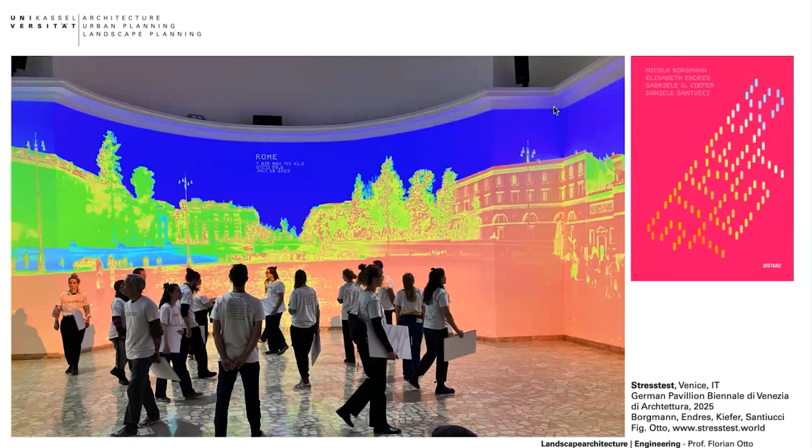Landscape architecture has arrived in the center of discussion of urbanism and architecture. You can see this very well in the German pavilion in the Biennale in Venice. This stress test claims that the cities are losing their capacity to host people in a good way, linked to the climate change or because of the climate change and the heat waves that we are facing there.

And that brings us, Bauchplan, and also the teaching in the university to the point that maybe the three elements of sustainability, environmental, economic, and social have to be put in another relation, so that every intervention has to follow that climate change impacts.

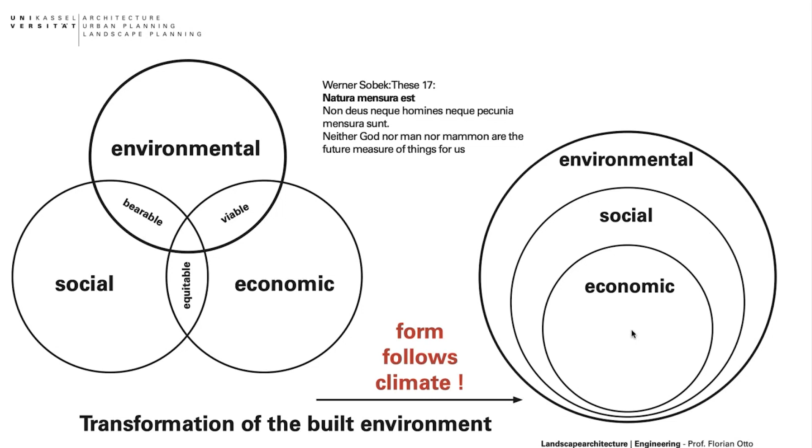And that goes along with the climate protection, of course, but especially for landscape architecture and urban space planning, climate adaptation and the climate perception, so that the physical aspect of what we do for the people in the cities, and climate justice, which is an especially important aspect to my mind.

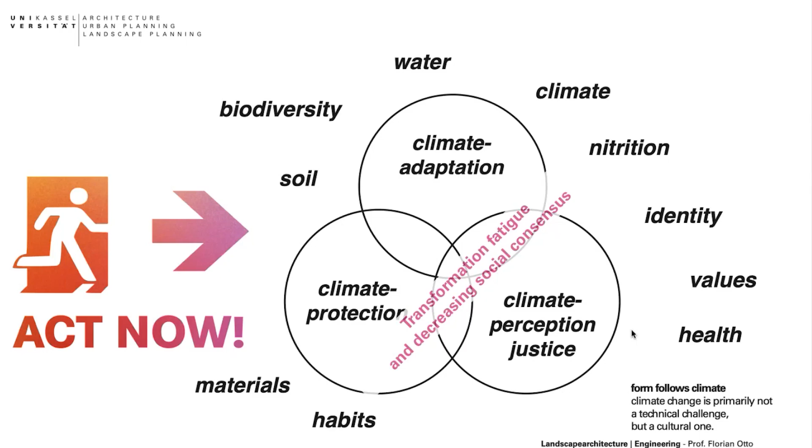And this comes into a time where we have something like a transformation fatigue. People are tired of changing systems. We have a rollback in policies, and we are losing a social consensus that we have to change and act according to climate change.

In front of this background, I was able to work in a research project for the Federal Office of City Development of Germany, the BBSR. There was a collaboration between the university and Bauchplan, and meanwhile this research is being carried on in a second step. I will try to give you an insight now into this research work, and then I will try to show you the showcase of Karlsruhe train station square.

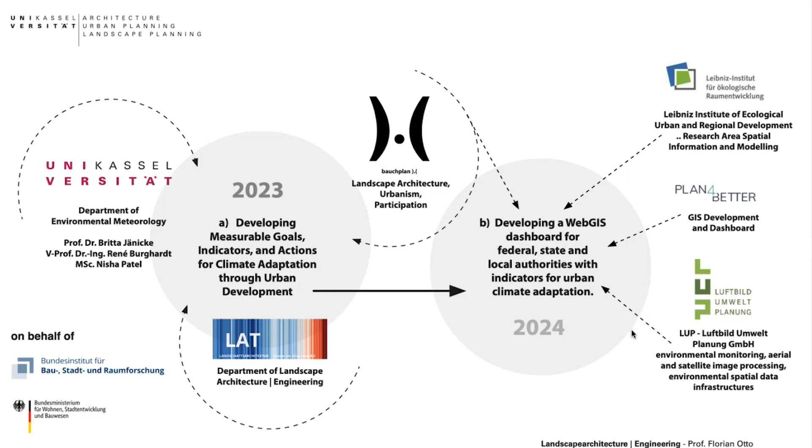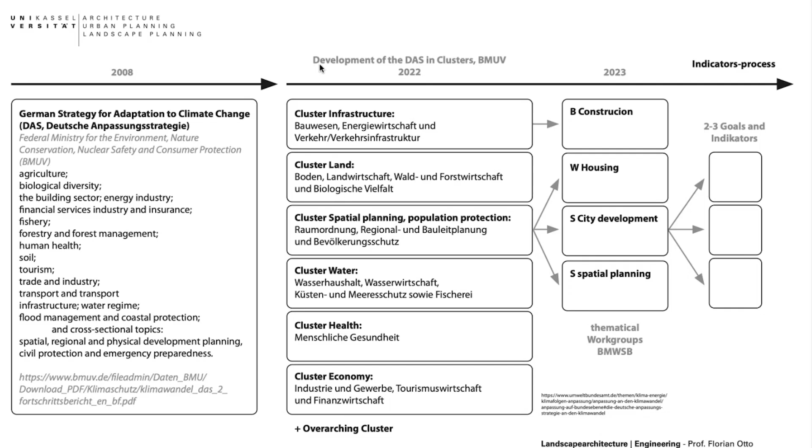So the whole project is embodied into the adjustment strategies of the German government that was launched some years ago, already in 2008. Adaptation strategies for the climate change, and we're in this cluster of spatial planning and population protection.

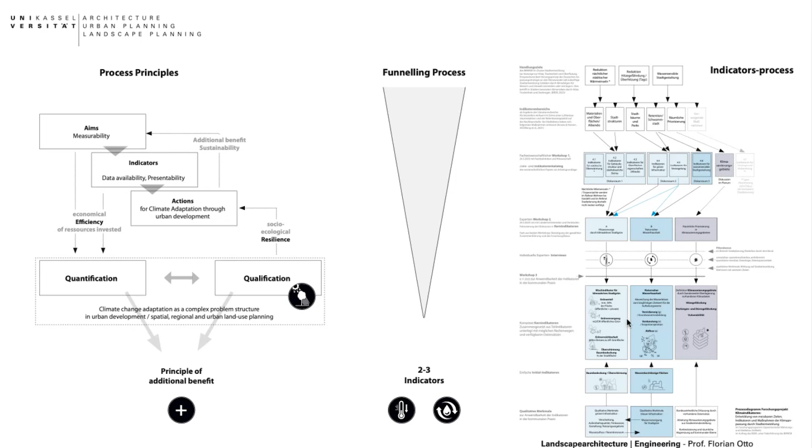And we were asked to find indicators for the successful adaptation in the field of town planning to climate change. In a funneling process with expert interviews and expert workshops, we finally identified two key indicators that can address an adaptation process or an adaptation strategy.

That this is a blue infrastructure and a green infrastructure, the natural water balance as the equilibriums of evapotranspiration, direct runoff, and groundwater formation on the one side, and this of course linked to the green infrastructure, where we made a key indicator

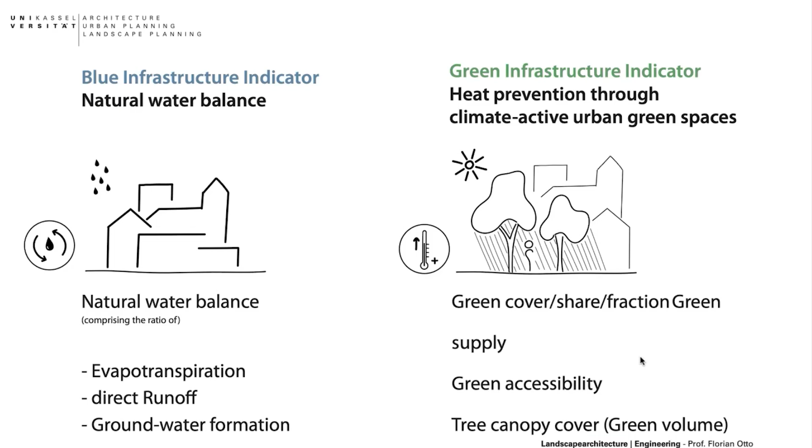comprised of four part indicators, which is the green cover, or the green surfaces in the cities, the green supply, which is rather linked to the population, not to the space, the accessibility to green shaded spaces, and the tree canopy factor, which is also linked to the nature restoration law of the European Union.

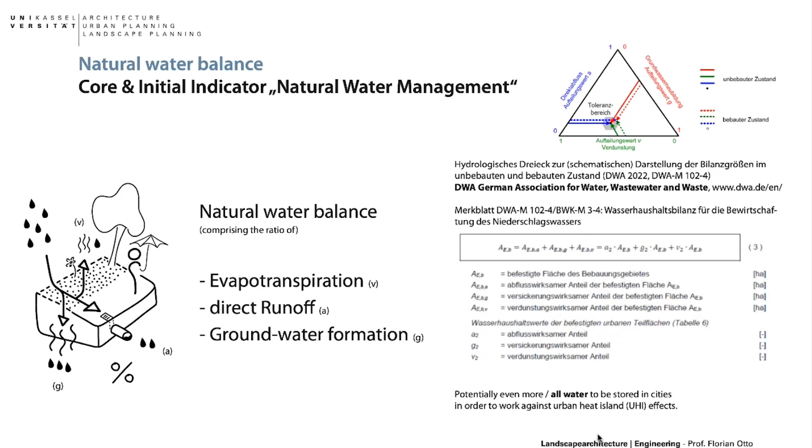So the natural water balance is a figure which is well known and which can be calculated very sharp. The problem is that in existing areas, you normally lack the exact data to calculate it. So because the indicators are to be developed for the existing cities in Germany bigger than 10,000 people at the overall federal level, we rather work with the sealing percentage of the soil.

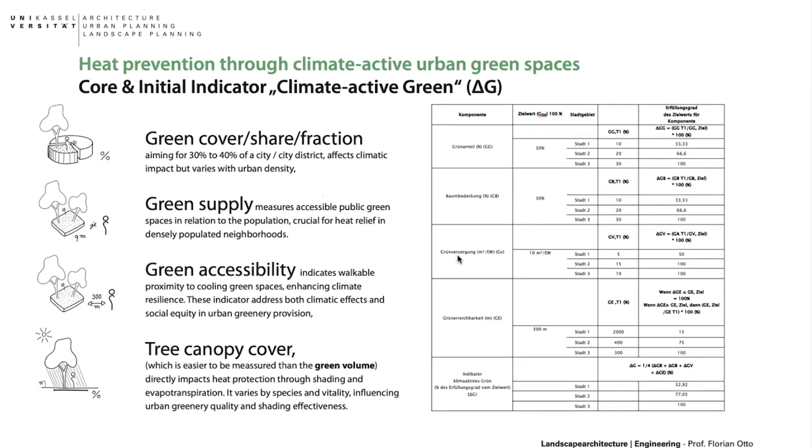And here's the heat prevention through climate active green urban spaces. So that's the four part indicators that I already mentioned: the green cover, the supply, accessibility, and the tree canopy factor.

We link our research also to policy making, and that means that we were interested to develop indicators which are easy to understand and to communicate. I don't know if you're familiar with Cecil Konijnendijk and this very nice indicator that he developed.

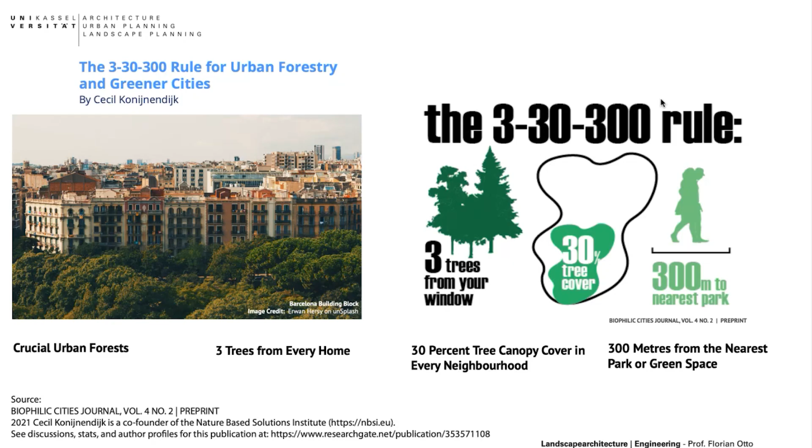The 3-30-300 rule, which he made to say everybody should see at least 3 trees from his windows. 30% of the tree cover of the city should be covered with trees, and also a figure that we use, the 300 meters that you should have to access a heat preventing green space in a city.

These two indicators are directly linked to each other because green indicators only work if you have a water supply, and we are also facing more and more droughts in the cities. So we have to link the blue indicator with a water balance and the green indicators with the green urban spaces. And we also have to combine as designers not only the quantities, but also the qualities of green open spaces.

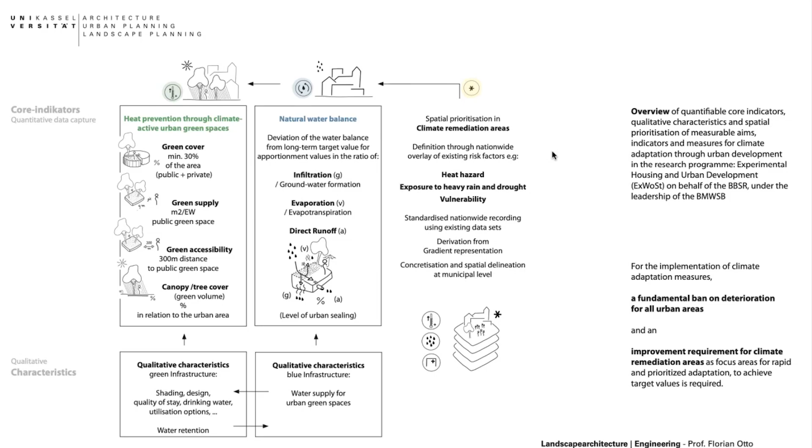The next thing is the political surrounding in which we are facing today. We will not be able to adapt all cities in all parts at once. We have to focus on the areas hit most by heat and extreme droughts and rainfalls, the climate hazards. So we try to identify climate remediation areas, areas in the cities which have to be addressed first in adaptation strategies.

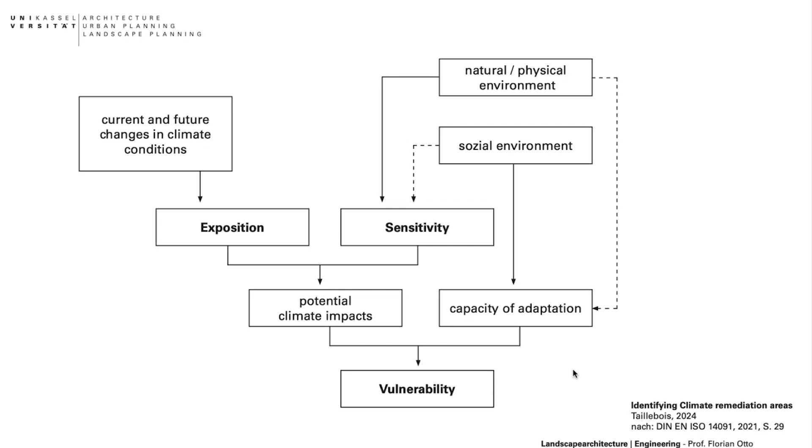And here comes the exposition of climate change, also the sensitivity of the population. This is linked to their social status and their possibility to flee the city in heat events, for example, and also their physical affectedness to climate events. So we have a vulnerability that is especially high for elderly people and for children.

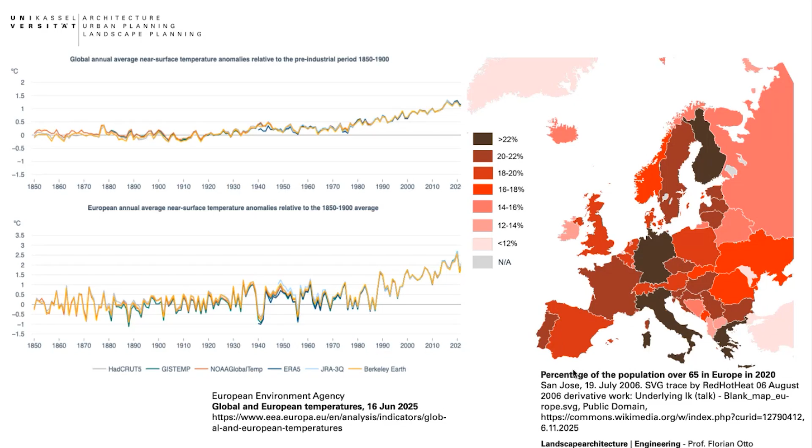And here Europe is in the front row. Not only is climate change hitting Europe the most, but Europe is also a continent which is quite old compared to other continents on the planet. So we really have a problem that more and more old people are directly affected by, for example, heat waves in climate change, especially in Europe. So there's every need for action.

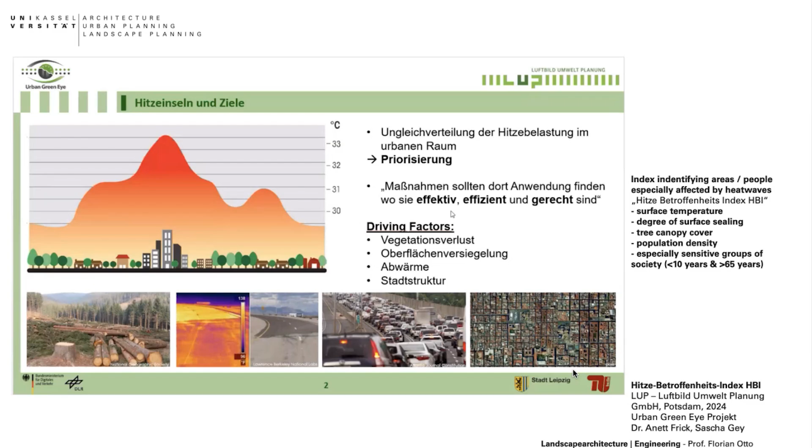And this is how we try to address it. In the second project, the LUP Potsdam developed an indicator which they call in German the Hitzebetroffenheitsindex, the affectedness by heat for people. This uses not only physical factors but also population aspects, like the percentage of elderly people in an area, to identify the areas in which we have to act first.

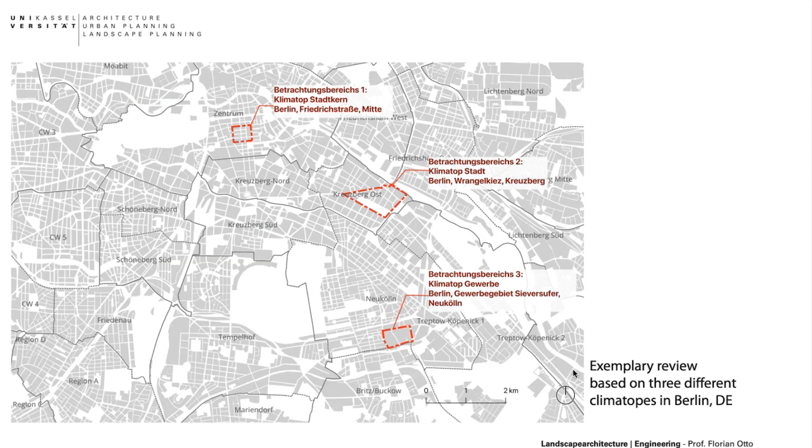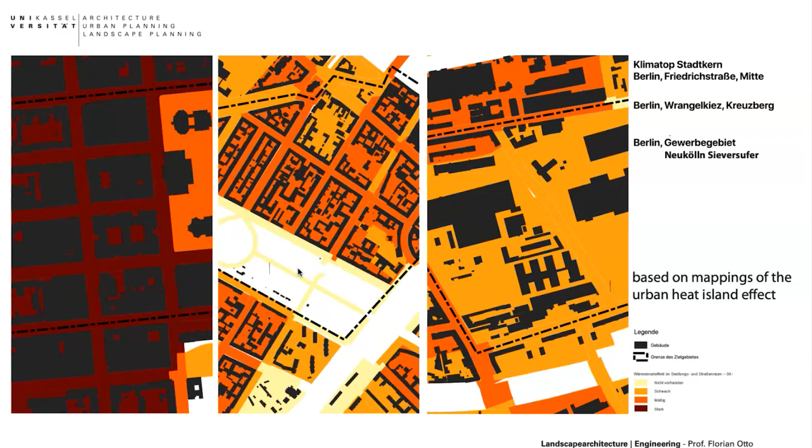And if you look at the areas hit most by heat waves, we tried this in a small triad within the research project. You can see that especially inner city, highly built areas here in Berlin, for example in the central district, have very little potential to add green in new areas. You would have to tear down buildings, so the adaptation capacity is quite low here.

And this is why streetscapes will have a special role in these adaptation strategies, because they're the only spatial potential that the cities have, which are generally owned by the cities. Of course, there's a lot of underground infrastructure, and we have the aspect of traffic there. So we also have to make the mobility change, the lecture we just heard, but also for climate adaptation.

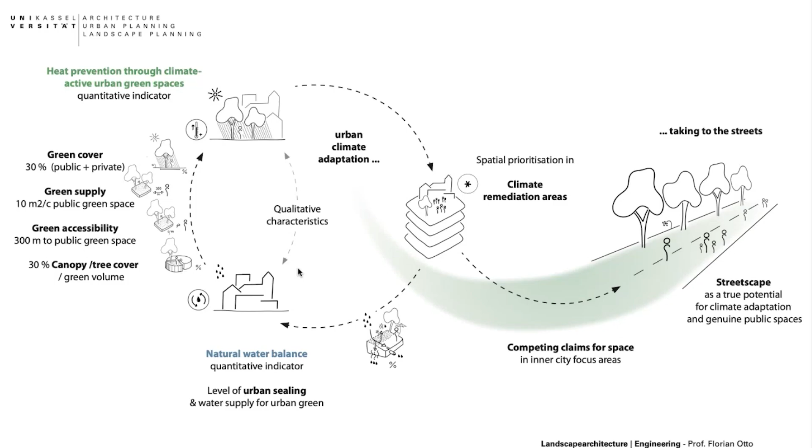The streetscapes will be crucial. And this comes especially - thank you Ronnie for the nice example in Helsinki - but this is a European phenomenon, that we have less and less traffic fatalities, which is great. And maybe the streets have to take another function, that they help us fight mortalities linked to heat and climate change.

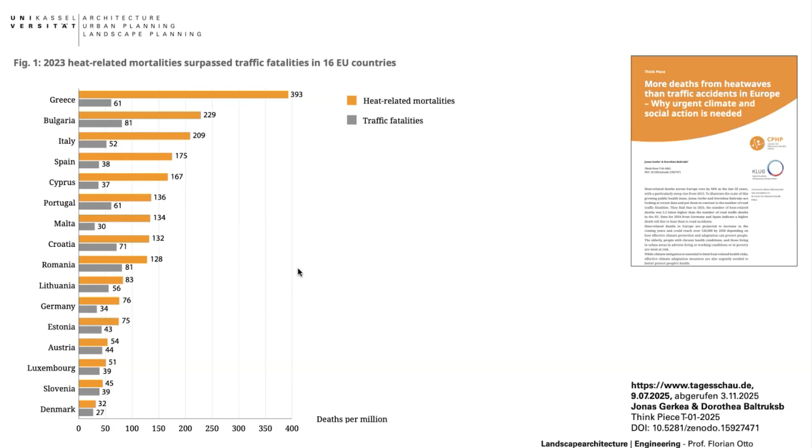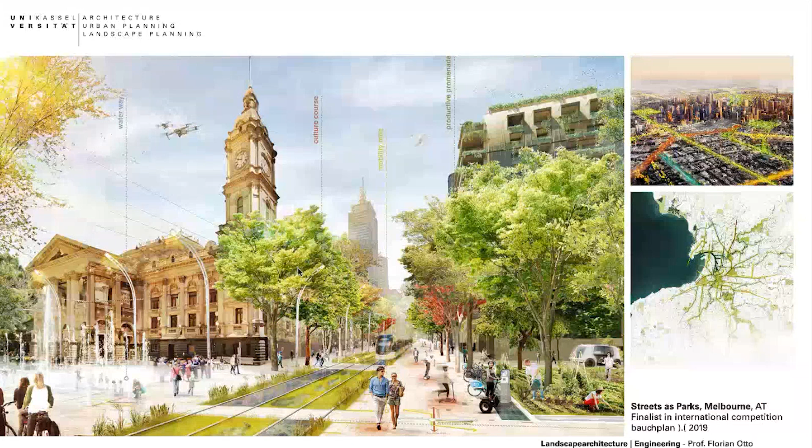Bauchplan made a few studies in this area. This is a proposal for the city of Vienna, or this was a competition entry for Melbourne, claiming that the streets might become the next parks or the next park system of the whole city.

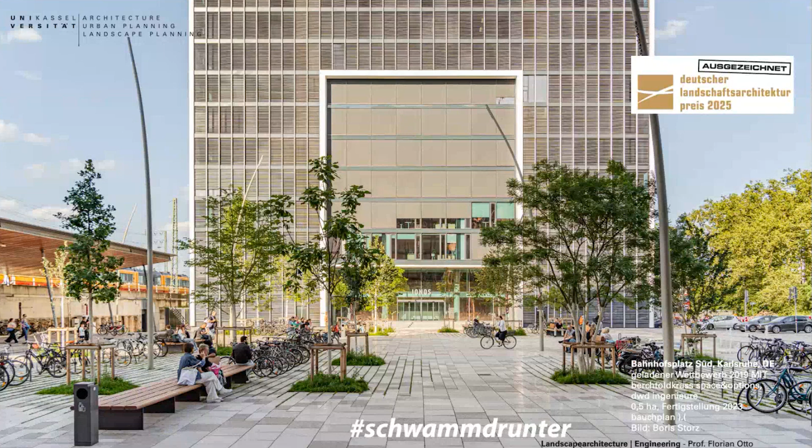But I will try to give you a small insight into the project I was asked to present, which is not exactly a street, but a sponge city project that we did in Karlsruhe. Bauchplan did this in Karlsruhe city. On the south side of the main station, there's a new business district being developed, and you can see here the high rise in the back.

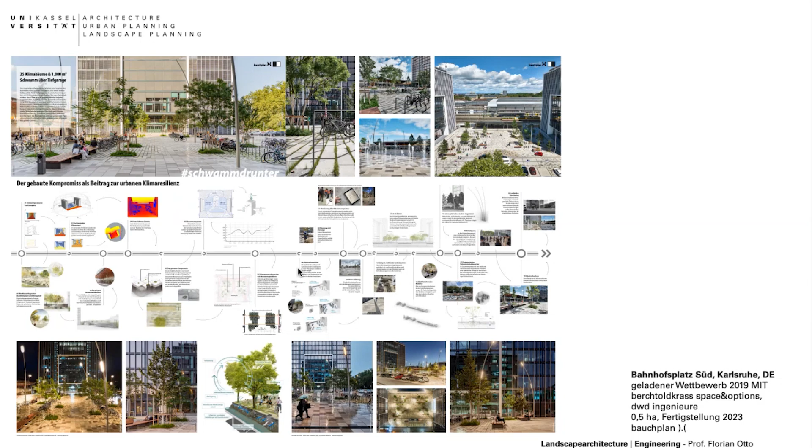There was a competition carried out, and in a very intense process, we were negotiating these climate aspects. There was a first prize win in the competition. This is how the square looked before. Of course, there's also an underground parking underneath the square, so we have this climate adaptation problem also underground.

Karlsruhe is in the southern Rhine Valley, so it's especially affected by heat waves by nature or by location already. And this square is facing south, so it's exposed to the sun all day. And we have also the reflections from the architecture, which is the same building on the other side - it's like a mirror. These were the driving parameters and aspects of the design already.

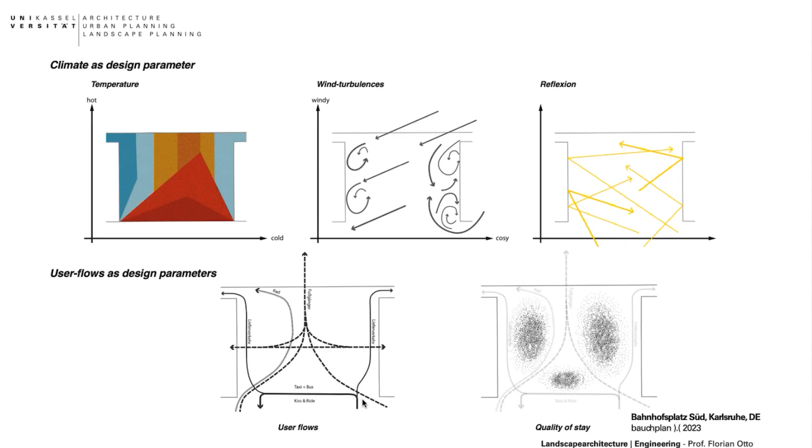We were dealing with the heat that would be there, wind turbulences, reflection, and the functions normal to a train station square. So we have the mobility which comes through the square, people arriving and leaving, and we also wanted to give some spaces for resting and cooling down. The whole design process was linked to climate simulations that we conducted in-house.

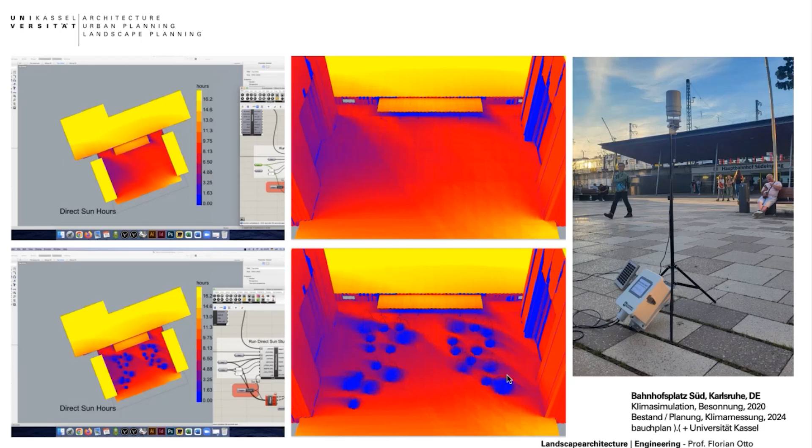We found out that with the shading and the cooling of trees, we can cool down the square by 10 degrees, which maybe doesn't sound so much, but on a hot day it can be the difference between 45 degrees and 35 degrees. So it's between a hot summer day and maybe the collapse of a weak person. So it can be a decisive difference of 10 degrees Celsius.

And in these areas, the surface is shaped in a way that we collect the rainwater. Even though there's very little probability of snow and ice in the southern Rhine Valley, we did not get the promise from the city or from the Deutsche Bahn that they could refrain from using salt in this area. So we had to keep some areas draining in a classical way, bringing it to the sewers.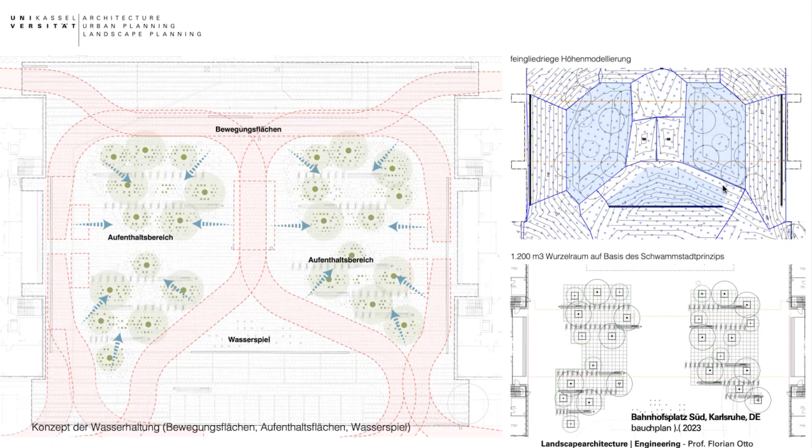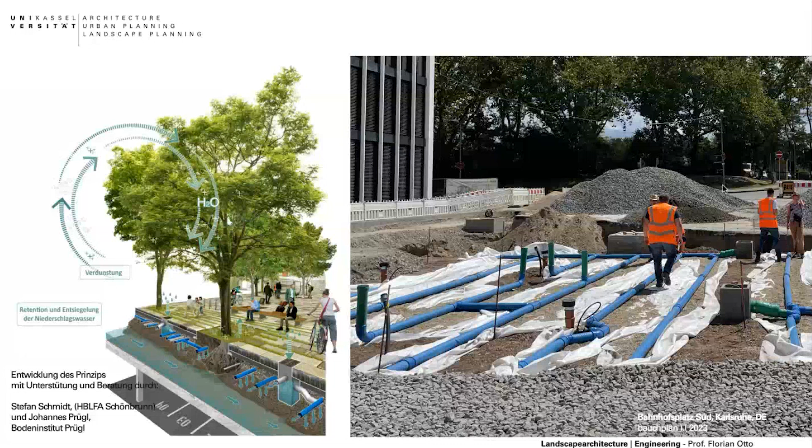But in these blue areas, we collect the rainwater and bring it directly to the trees. There's a space of 1,200 cubic meters of soil for these two groups of trees. It's spread evenly in these tree areas, so that all areas are attractive for the trees to bring their roots. And this looks maybe like the floor heating system you know from your house. So it's quite a technical infrastructure underneath the square to make it possible for the trees to grow.

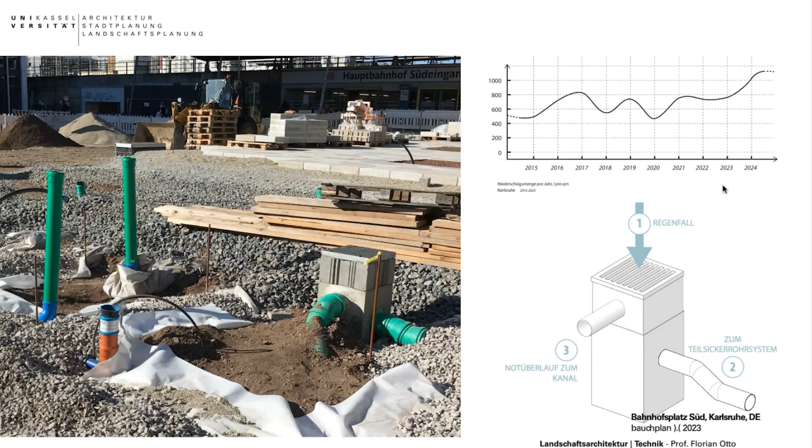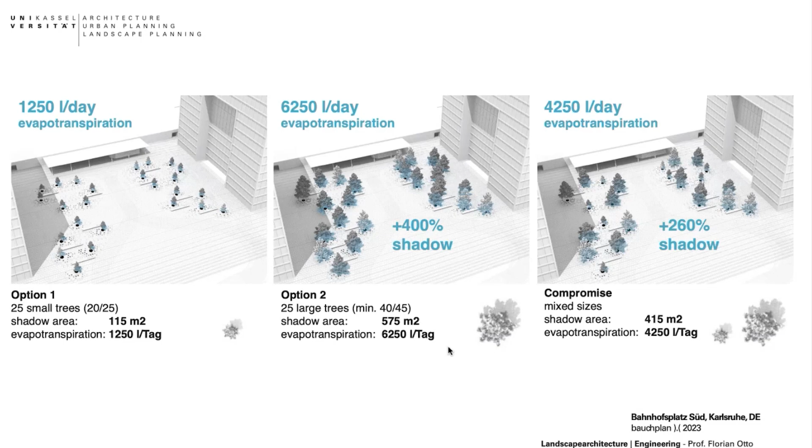This is the first year after the construction. So you see the smaller and the bigger trees, which gives us quite a lively appearance. You can see the two high-rise buildings to the sides and the main station in the back. It's the southern entrance to the main station of Karlsruhe. The city is in the north.

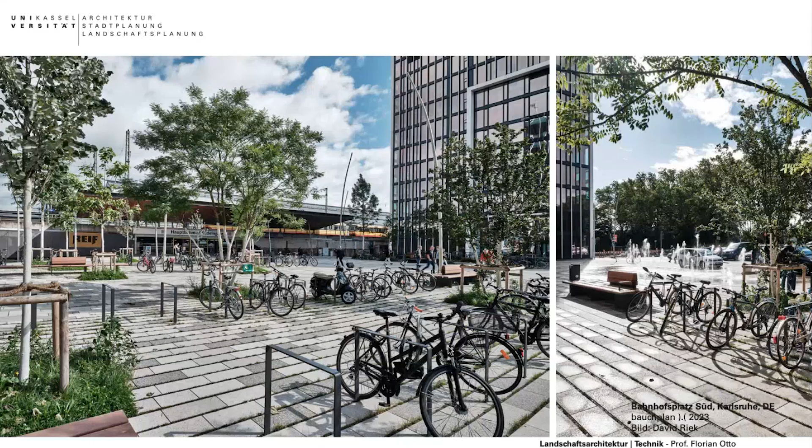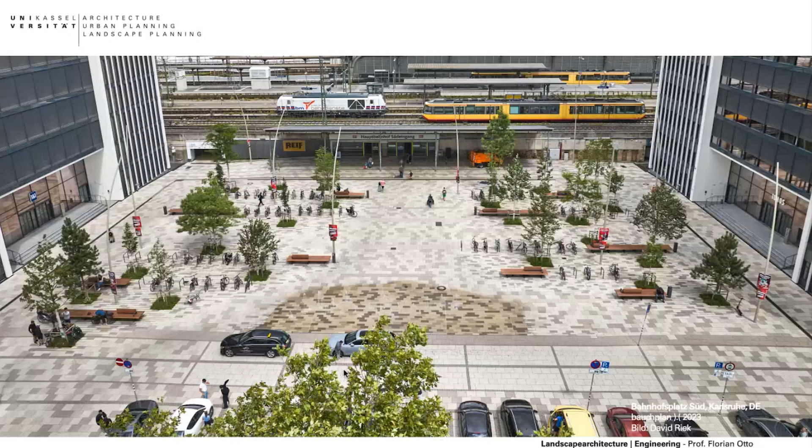We, of course, also integrated places for bikes. You can see the areas where the water can also infiltrate into the ground directly in these stripes. And here you also see the wet surface, which is the fountain separating the taxi driveway from the rest of the square.

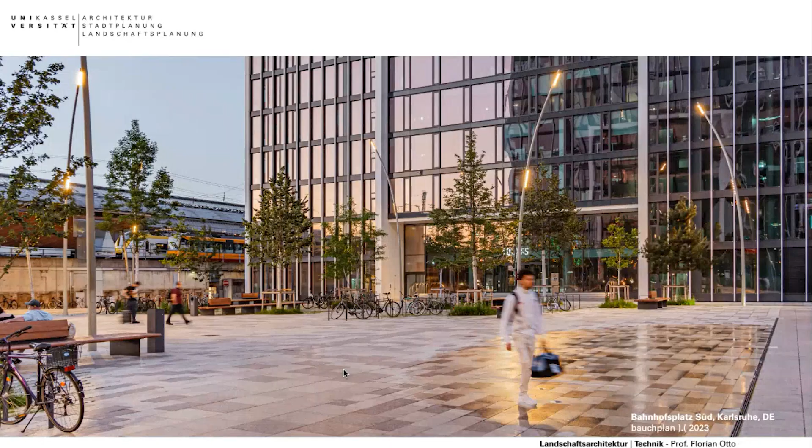If you ever have the chance to travel to Germany, I would recommend you get off at Karlsruhe and have a look at the square. Also, the lighting was designed especially for this place, making it quite comfortable, and also with this planting system with the big areas for the trees, the 1,200 cubic meters, we are very happy to see the trees growing up to 1 meter already in the first year. So it's quite a successful project. Another top shot at night.

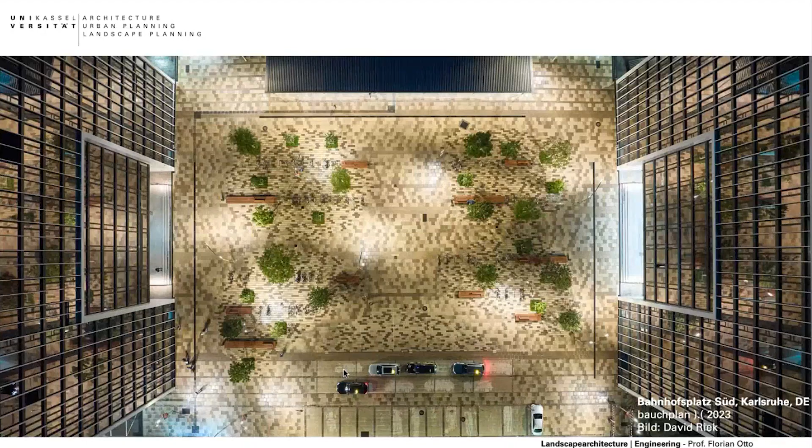I hope I could make clear that Europe is especially affected by climate risk, that we have to address these risks with both blue and green infrastructures, and that the streets are really crucial to climate adaptation in areas where we don't have enough space to make big parks or additional green areas.

And with this last example, I wanted to show that we have nature-based solutions, even though there's a lot of engineering in this project, to address these problematic areas for trees and planting. So the technical solutions are there, and it's now about using the opportunity to address the streets.